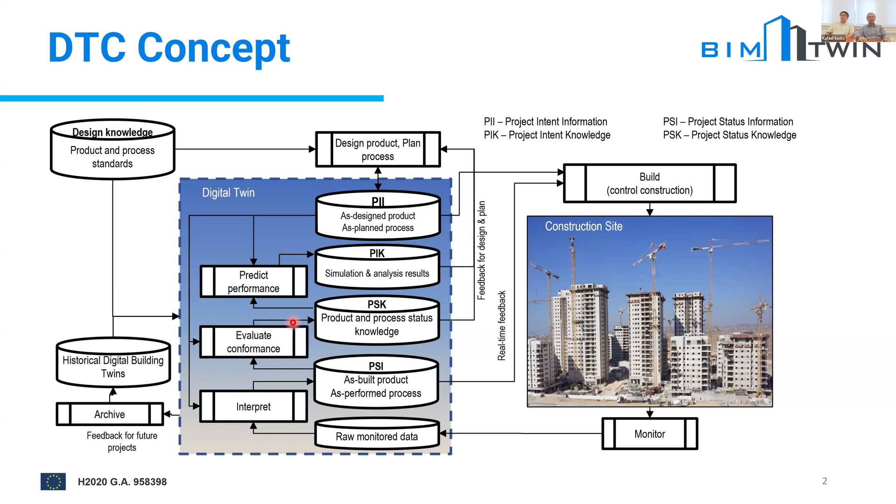The webinar we'll hear today focuses on the predict performance module here on the left, and we'll explain more about that as we go along.

The big idea here is to provide managers, production managers, construction managers, planners on site with an overview of the situation on the site, focusing on how the work is being done, the safety, the use of equipment, and in particular to give them an idea of how the production process might play out through to the end of the project, so as to be able to consider alternative plans and changes to the production system during the construction.

The BIM2TWIN vision as a whole is that we change construction from something that is amorphous and spread out and poorly defined, to one where everyone has access to up-to-date design information, real-time information about the status of the construction site and the supply chain outside of the site. All of that with the idea that we can then do informed, data-driven decision-making. And then it has the benefits that we list over here on the right-hand side.

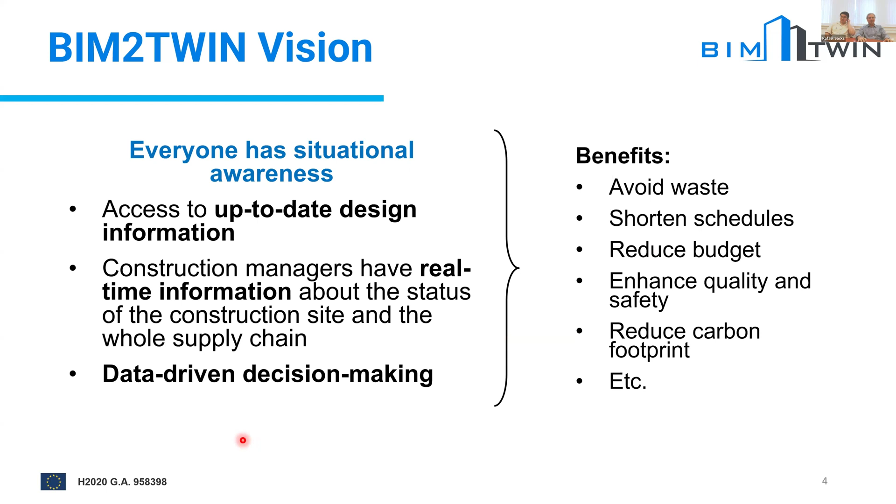The system architecture that we devised for the BIM2TWIN hardware and software revolves around the digital twin store, which we see here at the bottom, and we call that the digital building twin platform. So it has an internal data model, a schema defined in a broader ontology, and it's all stored as a set of interconnected subgraphs representing the as-designed, as-planned, as-performed, and as-built states of the construction project.

The information that we compile here derives from a series of monitoring systems where we have both initial data of the BIM model, the contract and schedule, and live data here at the top being collected on the site from various instruments.

The BIM2TWIN project contained 5 key work packages, each of which develop tools for these different vertical applications that operate against the DBTP. So they have volume control, process monitoring, surface control and process monitoring, safety control, equipment optimization. Those have been the subjects of the previous webinars.

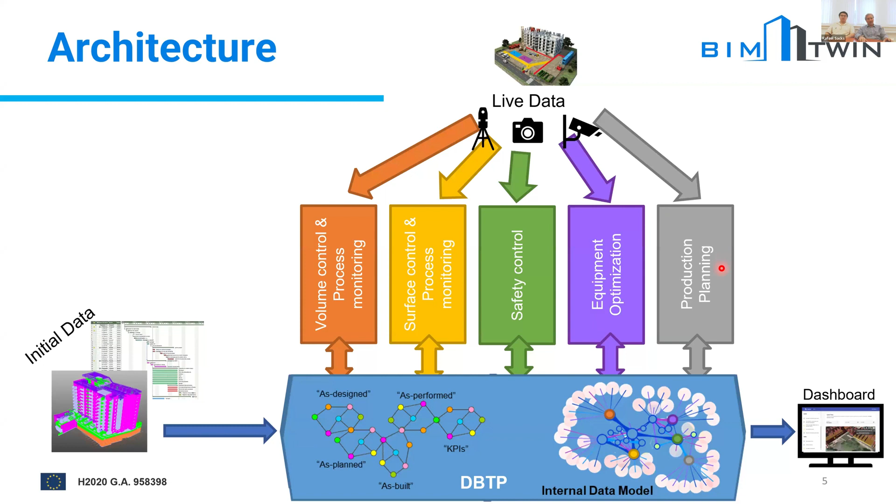Today's webinar focuses here on the production planning aspect, and as a result of that, we'll see both our local dashboard and the overall dashboard and how it's influenced by all the others. The generic DBTP situational awareness dashboard is where people have an interface into this data store, the graph, and they are interrelated with the activities of different work packages through the BIM2TWIN project. Today's webinar focuses on proactive planning and control, which we dealt with in the work package called Work Package 7.

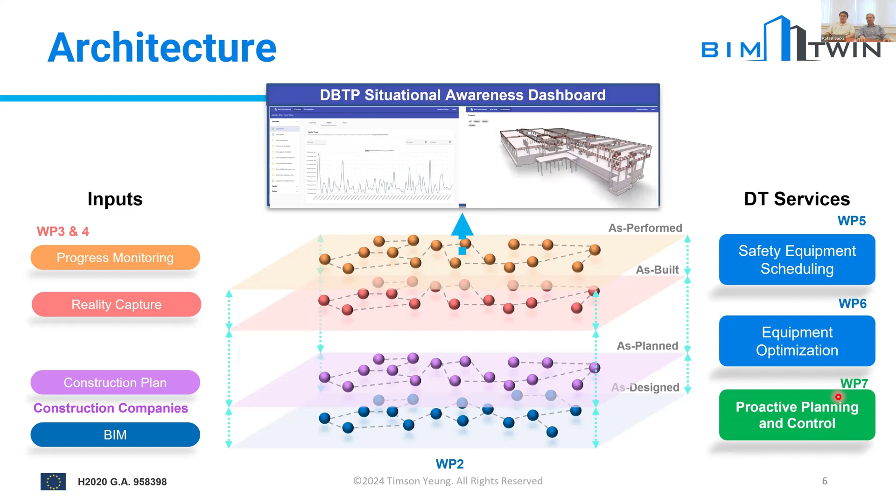We worked in both developing and testing and validating the system on different construction sites that are listed here in 3 different countries with 3 different project partners.

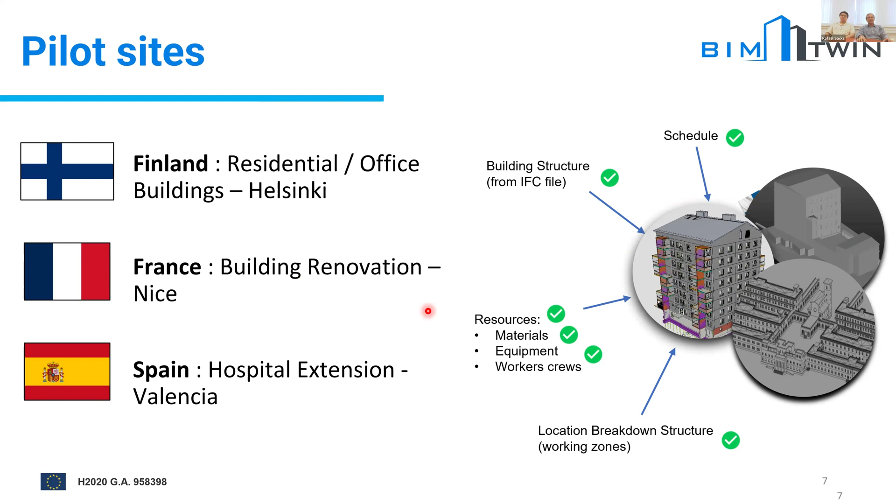This has been a series of 5 webinars, and this is the 5th of that 5. So here we are today on the webinar on production planning. I hope that those of you who are here with us and those who will see this later on video will enjoy and learn much from the session.

For today's session, we've had contributions from Flow Technologies, from SPADA, from IDP, and from Technion. We are the 4 partners who are active in Work Package 7. And with that, I hand it over to Timson.

Thank you. So in Work Package 7, our focus is particularly in the predict performance part, and then how using the project status knowledge and the project intent information, we can use those to predict the performance of the construction site and use that to contribute to the project intent knowledge information.

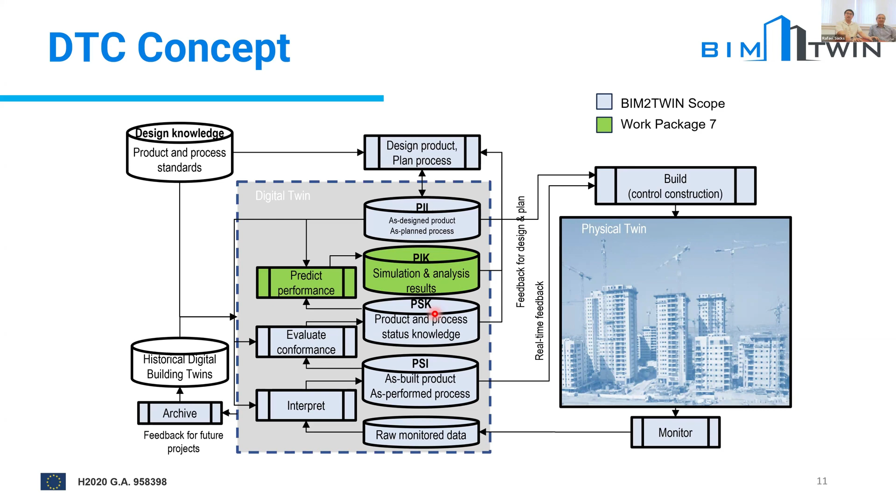In Work Package 7, we have 3 goals to accomplish the aim of predicting performance. First, we want to develop what the procedures are in order to predict the outcomes of production plan and design changes. Then based on those system requirements, we'll build that software and then test and validate it on the pilot sites that our partners in the consortium will provide.

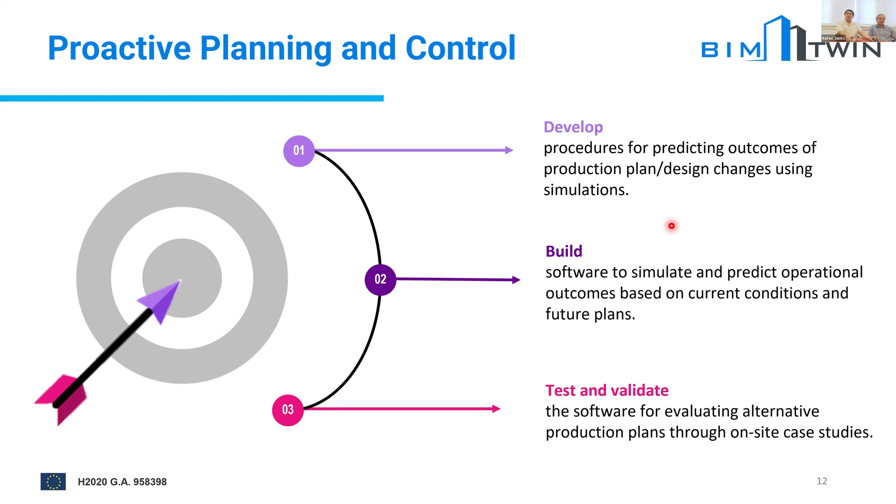In Work Package 7, we want to enable a cycle where users can define alternative plans or changes they want to make. We take this set of alternative plans and put it into the simulation engine, where we predict the fan of possible outcomes for each alternative. Then users can compare between these plans and select their preferred course of action. This information is put back into the digital twin to inform persons on site what the next plan should be.

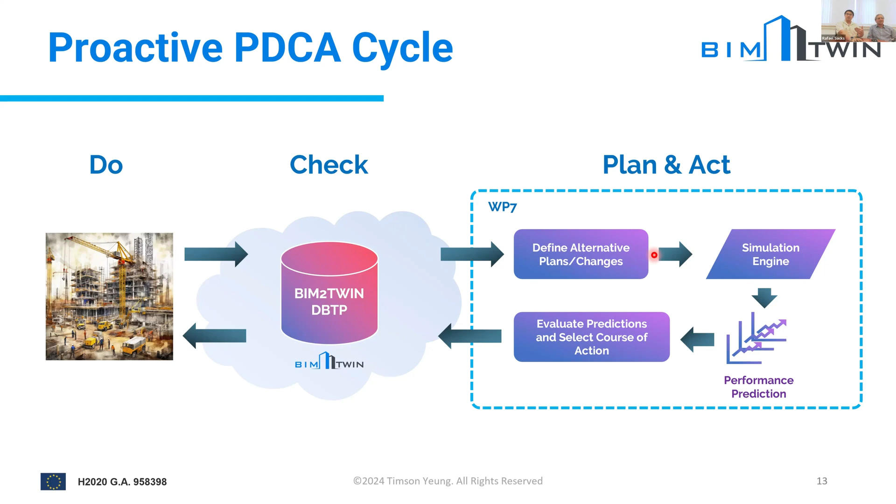What the simulation can do is take the original plan at this current point and ask, what if we stick to our current plan? What could be the possible outcomes? We can run the simulation multiple times, considering disruptions and variances in the production rate, running it repeatedly until the end to get a fan of all the predicted potential outcomes of sticking with this plan.

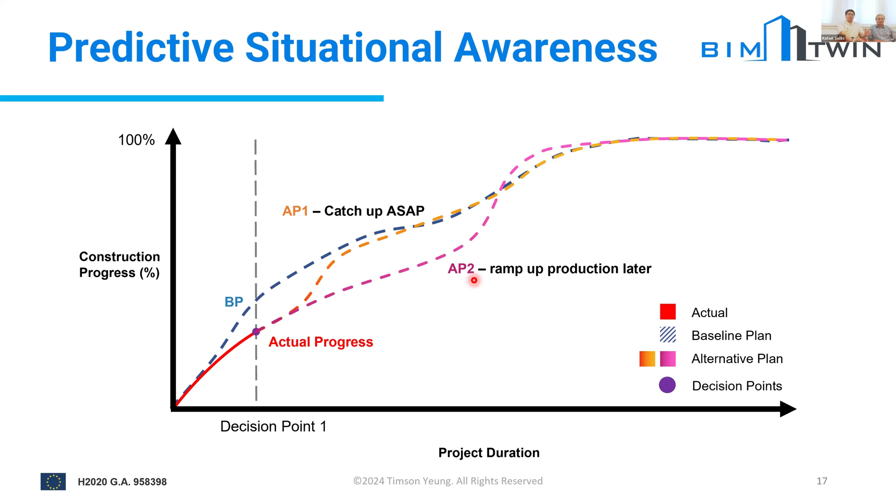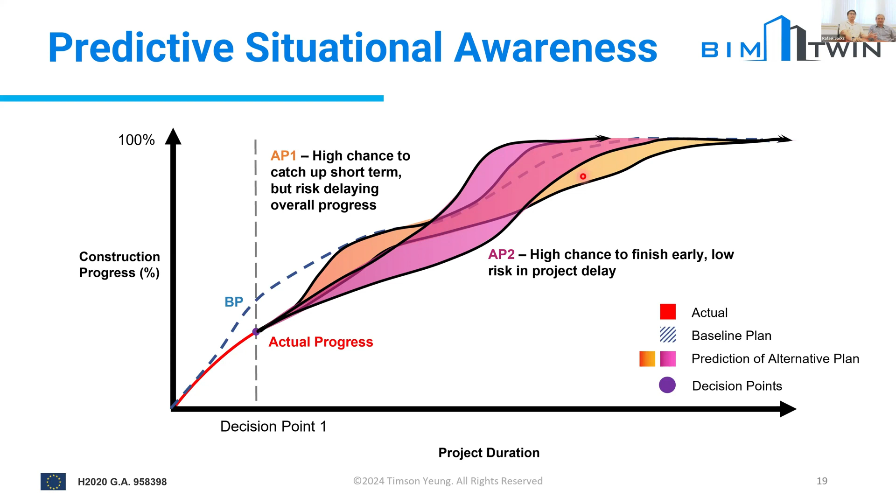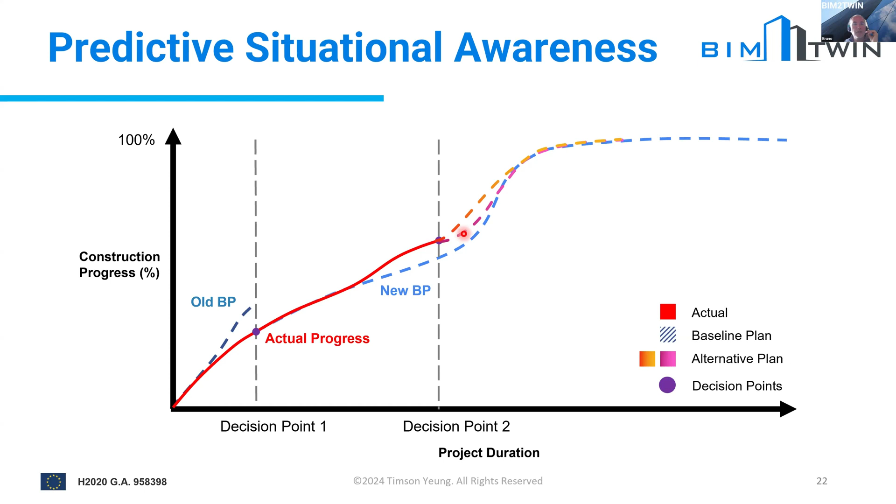Timson, sorry, I don't know if it's me, but I cannot hear you anymore. Yeah, me neither. Hello? Okay, it seems you're back. So sorry, where did I get cut off? At which slide should I go back to, or is it just here? I think it was here, yes.

So in this slide, I want to illustrate that this plan-check-act cycle can happen multiple times throughout the project. From decision point 1, we can go to decision point 2, where the project is actually ahead of schedule, and now we can consider whether we can slow down the pace, use less resources, save a bit of cost, while still finishing on the milestone. Here we can have alternative plans as well.

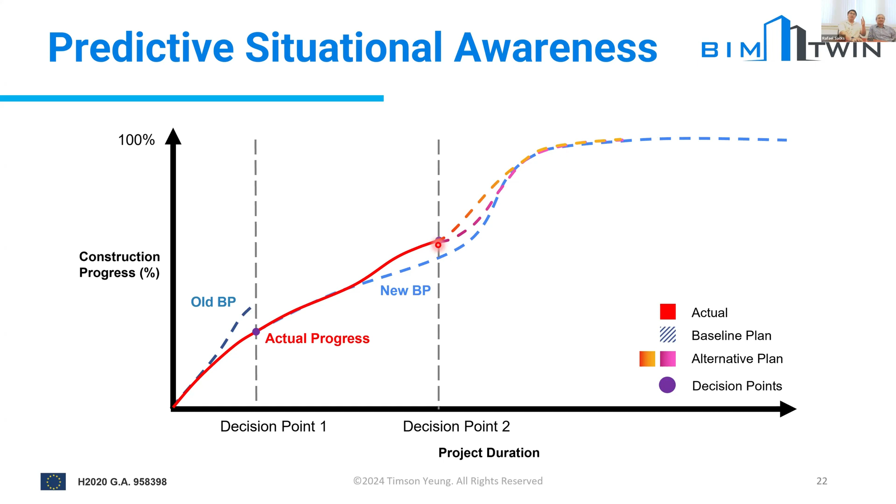One more thing I would like to highlight is that this plan-check-act cycle with simulation can happen with or without the digital twin. If we collect the data even manually, we can have this kind of plan-check-act cycle. But why is it important that we have this simulation together with the digital building twin platform? It is this factor of latency.

If we take our original case, for example, decision point 1 was right here, where there is already a huge discrepancy between the plan and the actual. Really, the first sign of delay happened much earlier, maybe 2 weeks, 3 weeks, or a month beforehand. But in current construction sites, this process of data collection, interpretation, and then ultimately putting it back to the decision maker's hand has a very large latency.

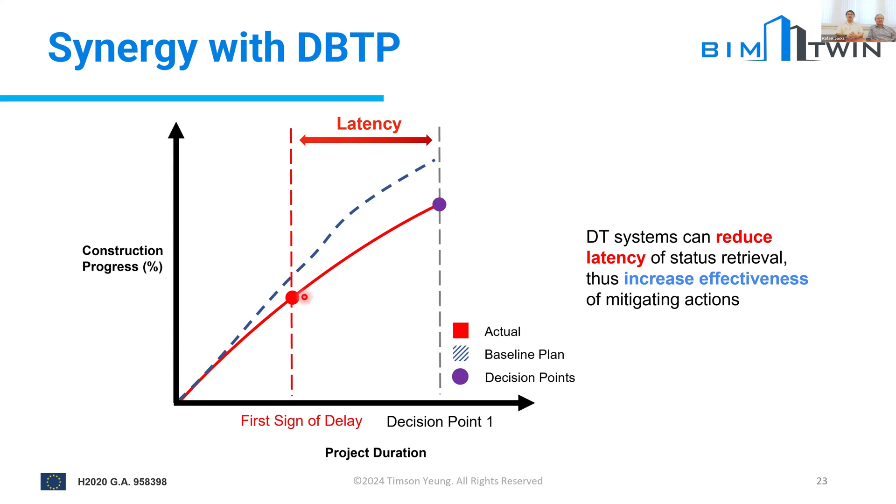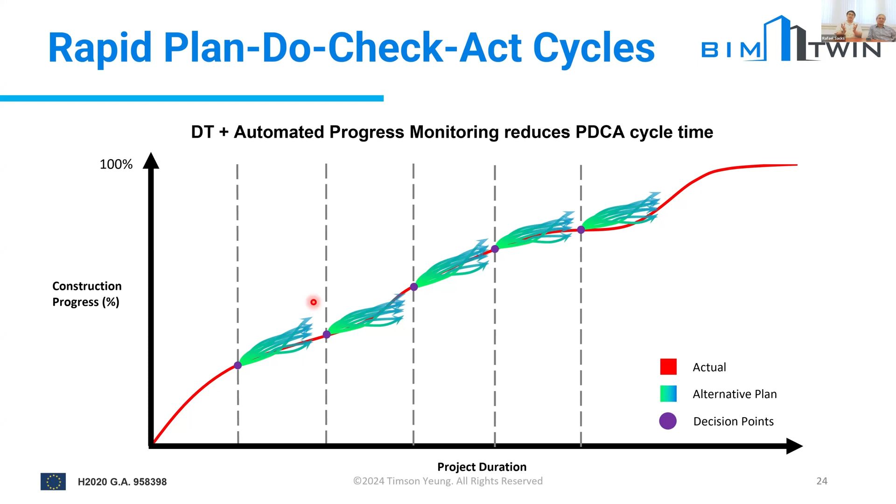And so ideally, if we can have mitigating action implemented at the first sign of delay, then it will be much more effective. That's what the digital building twin platform can offer, because with the combination of automated progress monitoring and real-time interpretation and fusion of this information, we can reduce the time from signs of disruption or delay to making a decision to mitigate that delay. So the plan-check-act cycle time will be shorter because of the digital twin platform. This is the synergy between simulation and digital twin.

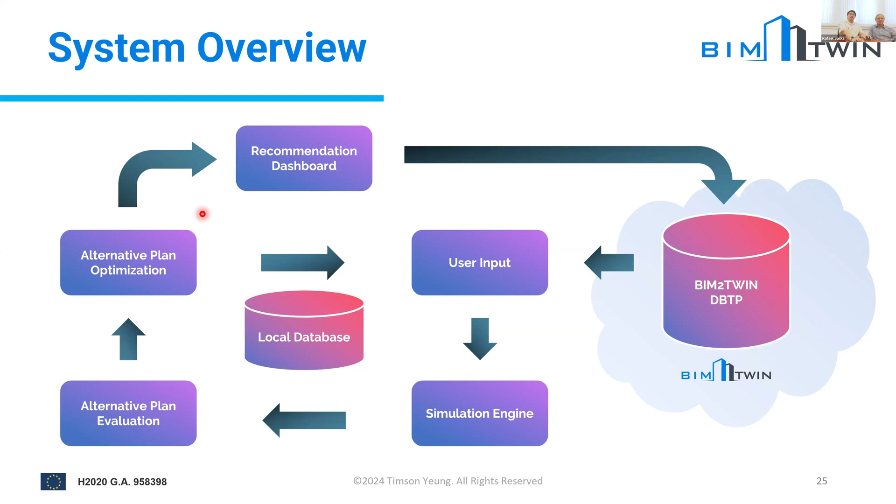Now I will show you the system we came up with in work package 7. Here's the overall system architecture, where the digital building twin platform provides us with the latest project status and project intent. The user can then decide their scope of action and degree of freedom in the plan. Once the alternative plans and their degree of freedom are defined, each plan can go through the simulation engine, and the output will be evaluated. We can either perform an optimization loop according to the range of degree of freedom, or provide results directly to the recommendation dashboard where the user can compare different alternatives.

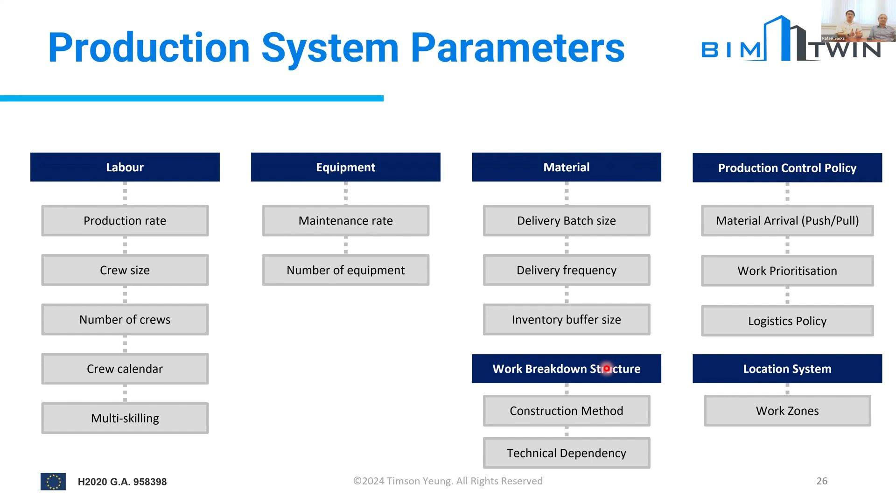When we're talking about alternative plans, we're not so much talking about the schedule, because the schedule is just about how we're doing it. Here we are actually talking about the production system parameters, such as resources like labor, equipment, material, and also production control policy, and the work breakdown structure and location system. So we're talking about parameters that the planners can change, not just the sequence of activity.

Let's take an example of how a plan might look like that the user can define. So for labor, we can have different work packages, such as HVAC. For HVAC, there are 3 crews, and for one crew there could be 3 workers. Their work hours per day will be 8, and they can be multi-skilled to do both ventilation and pipes. The production rates for ventilation pipe is 10 meters per hour per worker, and pipe is 3 meters per hour per worker. For each crew work package, these are the parameters that the planner can decide on.

With the production control policy, the manager can decide for each of the materials being delivered whether the delivery method is pull or push. Are the materials arriving according to some specified date in the contract, or is it something that can be pulled according to what's needed on site, perhaps even with a buffer?

The manager can also specify how the site managers are doing the assignment of work on site. Are they prioritizing closing off the floor so they can hand in the whole floor to another work package? Or are they prioritizing closing off by zone, sometimes by apartment or by room, if that's the unit of control, say for takt production? They can also prioritize the work either by the work quantity or by how much work quantity remains.

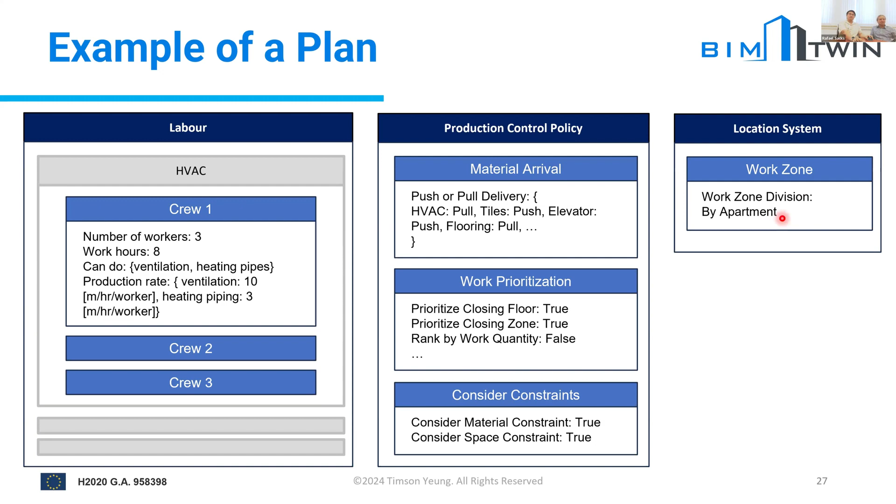In our simulation, we use the agent-based simulation method, where we model the complex system by defining individual agents or actors that interact with each other. An agent could be people, like the site manager or the worker, or it could be a passive agent like a block of concrete or a room. These agents interact with the environment and develop emergent behaviors.

There's a synergy between agent-based simulation and the way we've modeled our digital twin platform, because we've used a graph-based object-oriented way of describing the construction site. By defining agent classes, we can match them with the ontology we define in the digital building platform, thus creating parallel between the digital twin and our simulation.

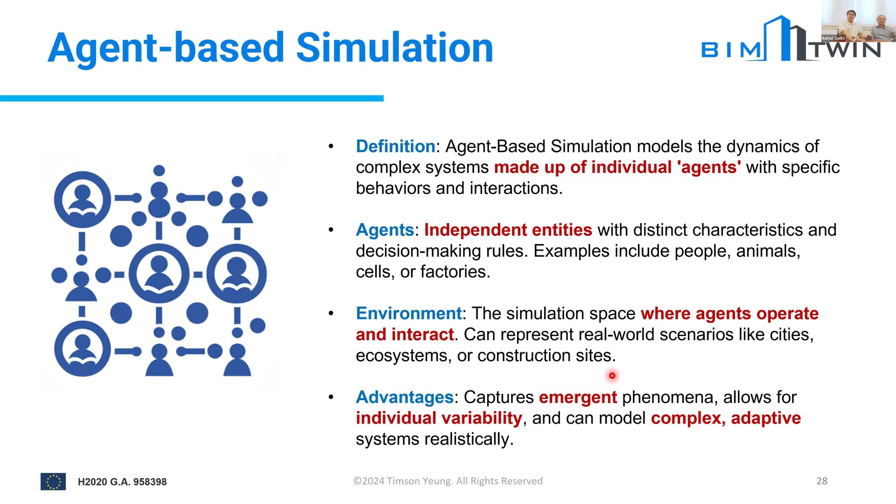In our simulation, we have modeled 5 categories of agents. We have GC management, which is a combination of the roles of the site manager and the procurement department. We have subcontractors who are responsible for the work crews, and the work crews themselves, which is really the core of the construction site where they perform work. We also have the supplier and the design firm, which would deliver either materials, components, or in this case, information.

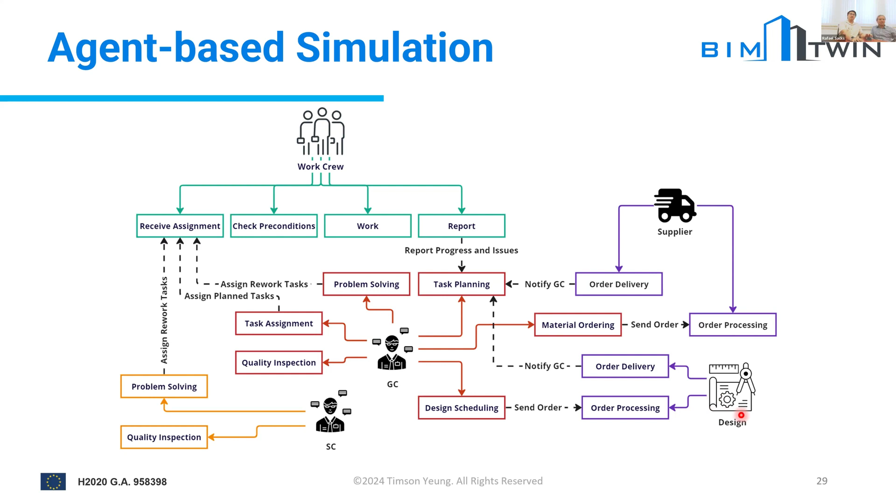To come up with this model, the first step we did was interview different persons on the construction site - workers, foremen, managers, and even suppliers - so that we could model the behavior of each of these agents. Here is an example on the right.

This is an example of the work crew, where the work crew first, once it receives an assignment, will check whether there's material. If there is material, then it will check whether the space is being occupied by someone else. If it is not occupied, then they can go to work.

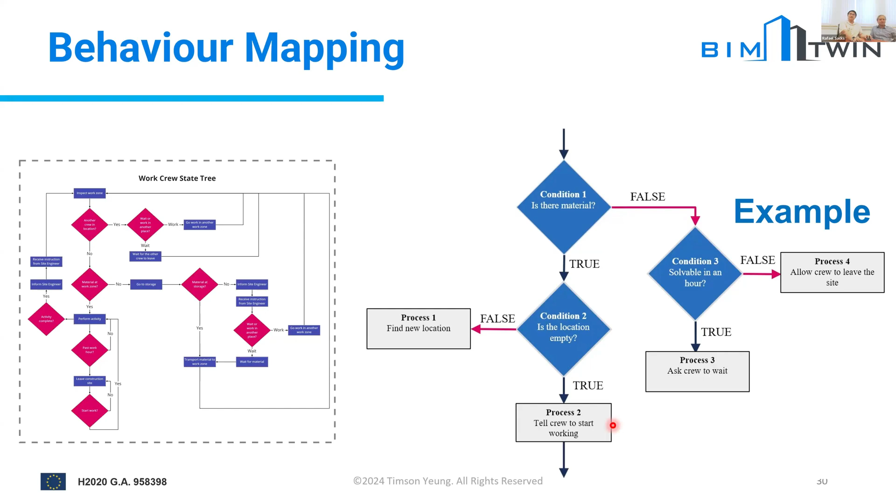Once we have all these behavior trees done with each of these agent classes, we modeled it inside the simulation software called AnyLogic. Here, each agent has 4 main parts.

The first part is the parameters or characteristics that are defined from either the digital twin or from the input information that the planner had got. Then there are perception variables, which is really the brain of this agent - this is their memory, of what they have done, what they needed to do, and also where they're at currently.

Then there are behavior functions, what we call the specific logics for their action. Finally, all these parameters are used in the behavior tree on the right-hand side, where the agent can decide what is the next course of action, depending on where it is at in time and in space.

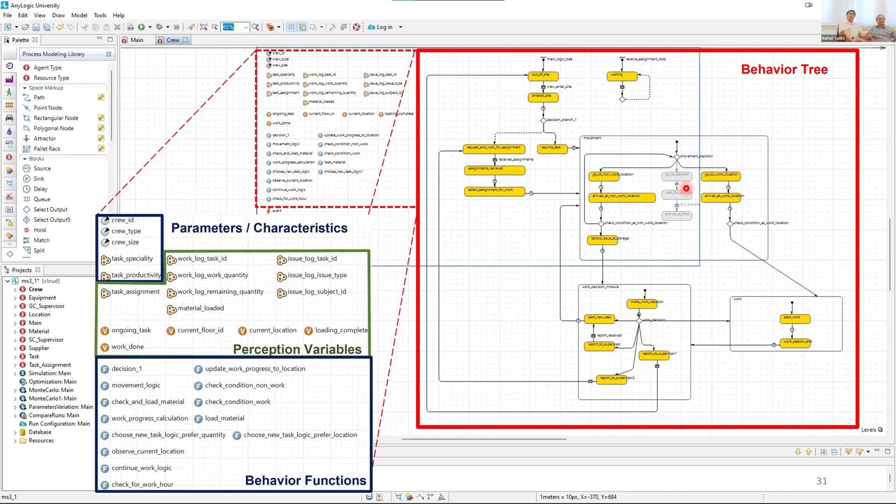Continuing with this part about synergy with the digital twin - a big part that we felt was very important is that the simulation model has to be able to take the latest, most up-to-date status, that of the current day, and then initiate a model that starts at that current date, instead of always starting at time equals 0. We believe it is only when we can take the current status that we can have the best prediction of the future and avoid a garbage in, garbage out situation.

So this is how we are able to do this. On the left-hand side, we have several sources of information. We have the digital twin platform that provides us target status. We have agent templates where in AnyLogic we've defined for each type of agent what is their default behavior and what are the toggles that they can switch on and off based on the status. And we have the user input module, which gives us what each alternative plan would be, then adjusting the toggles on the agent classes based on that.

Finally, we have a historical database that can be used to calibrate the production rates and the rates of disruption. All this information is fed into a parametric generation algorithm that takes the project status and the agents, and generates in each simulation what is the state of every task, what's the state of every zone, and what are the states of all the agents - their parameters, what they've already done, and what they will do. Each of these simulation runs will be run for that current state.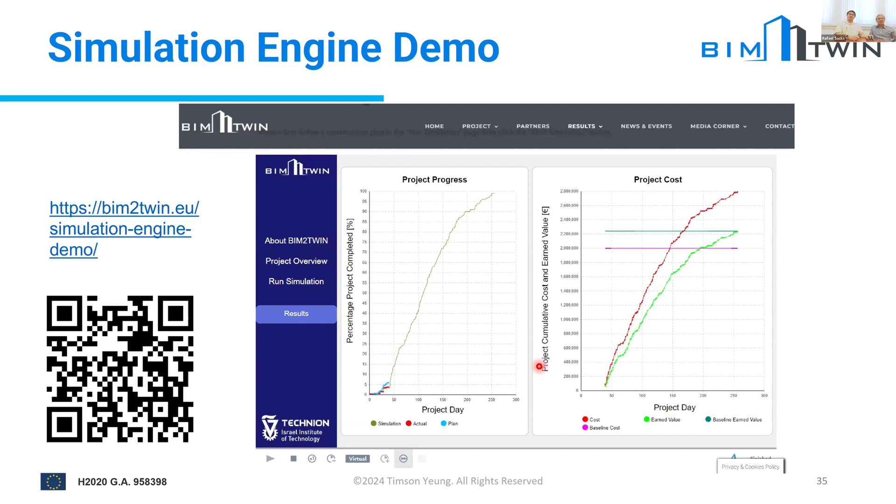In this one, you can change and define the different crew parameters and also the production control policy, and then run the simulation one time to see how it would look, starting from any day within 0 to 120 days, and how that simulation goes for the plan that you choose.

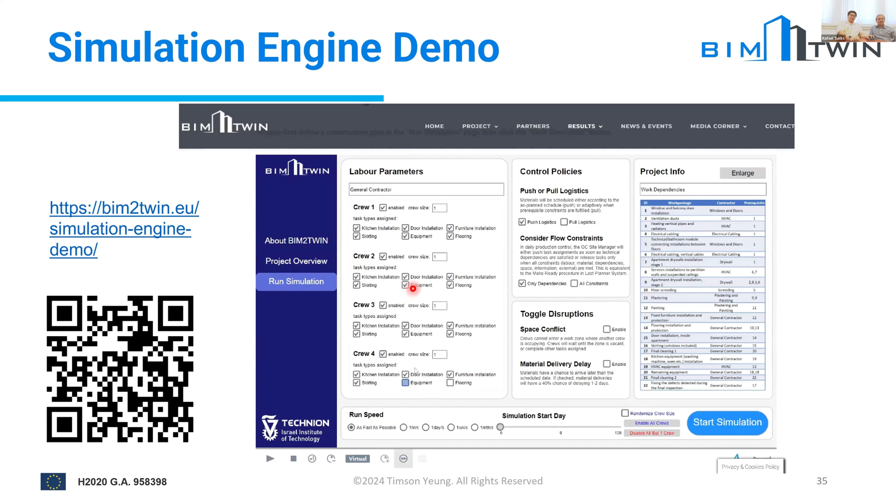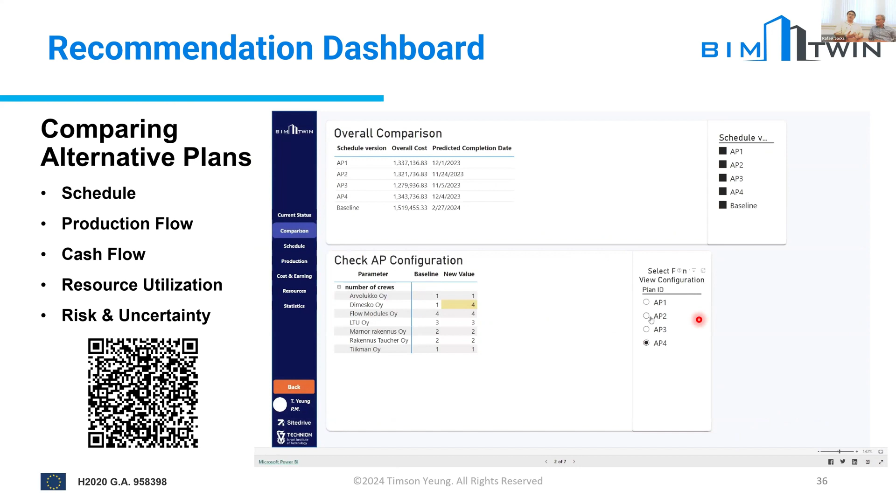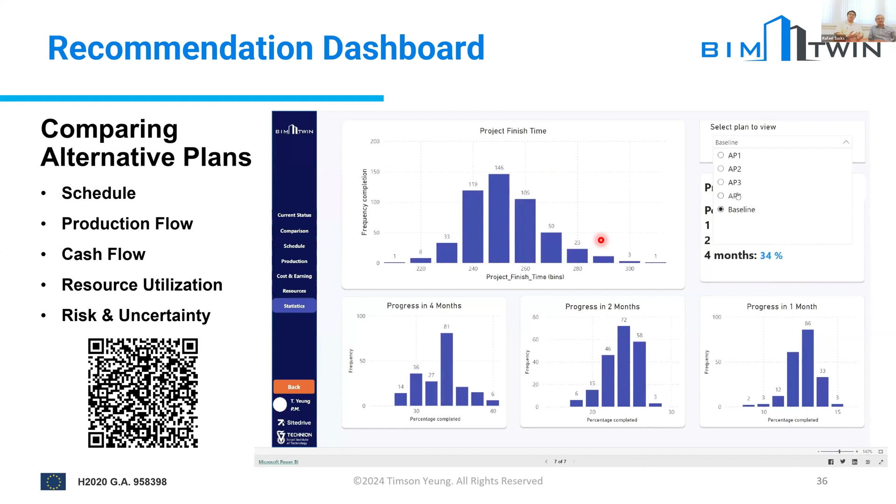We also have a recommendation dashboard that we developed jointly with SiteDrive from Flow Technology, where we can take a set of alternative plans and compare the results between them for their schedule, production flow, cash flow, resource utilization, and what is the risk and uncertainty. You can also check this recommendation dashboard out for yourself with the QR code.

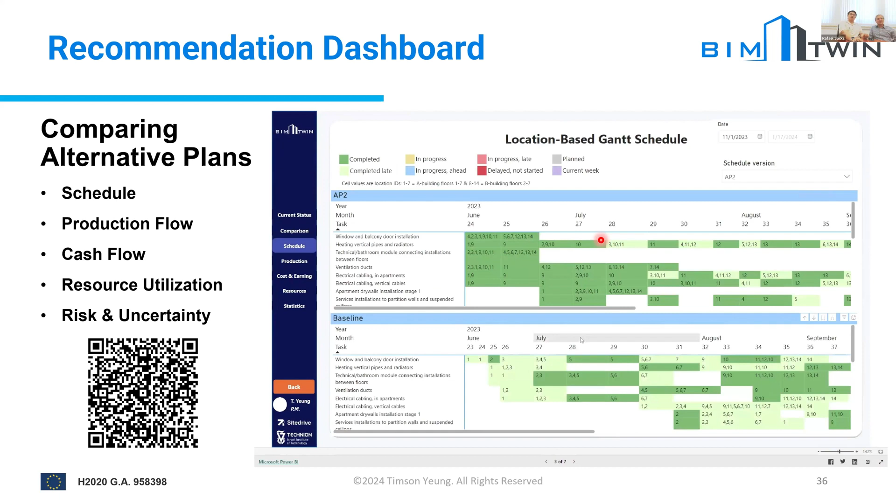Now, to close this all up, once the plan has been selected as the new plan, we need to put it back into the digital twin platform. This is the part where we've done quite a lot of close collaboration with Work Package 2 in the BIM2TWIN project with Orange, where we can pick up on where they have developed a way to store all this information as a huge graph.

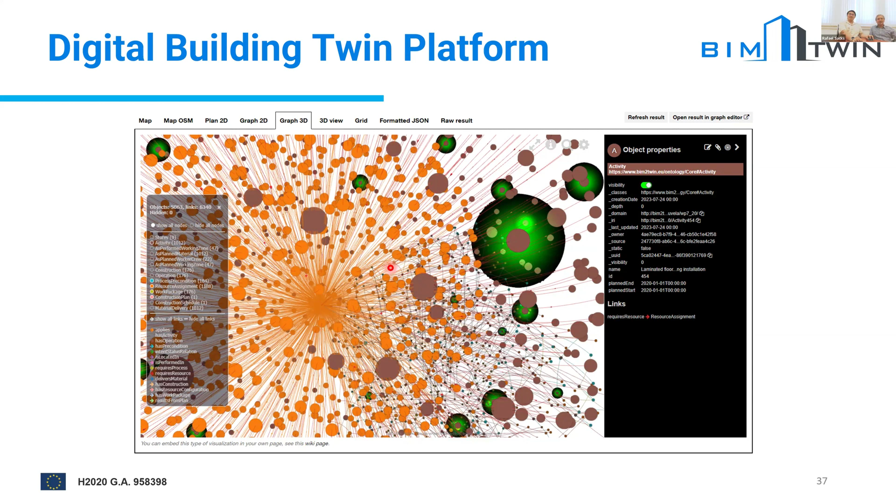In Orange's Thing'in platform, we're able to use API calls to first receive what is the current latest plan. Then, once the user has decided what the new plan would be, we can use the API to rewrite that plan, upload a new plan to the Thing'in platform graph, and set that as the new baseline.

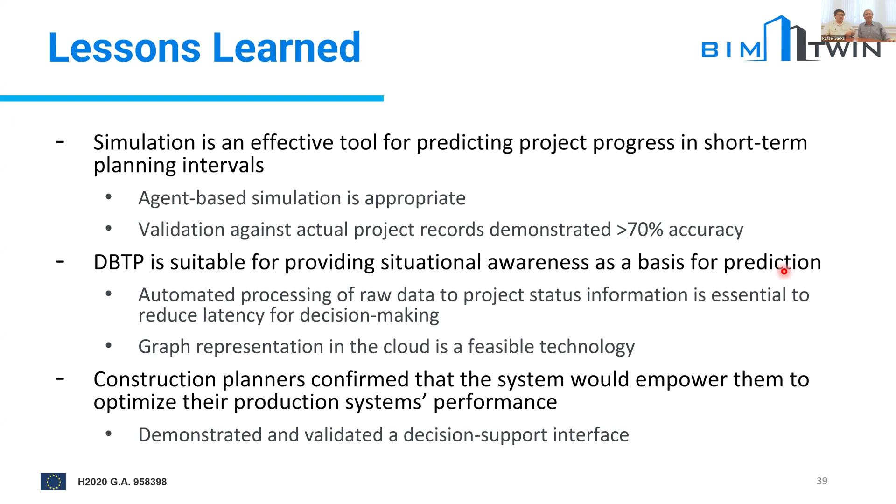And finally, we'll skip to our last slide and say this: as any research project ends, there is future research to be done, but we've been able to pinpoint, I think, the issues that need to be tackled going forward for commercial implementations.

That is, firstly, that a digital approach requires data to be structured and coordinated. So collecting raw data on site is possible, but that needs to be structured, interpreted at the level of raw data to information, but then it also needs to be merged with various streams of raw data in order to get the information and knowledge we require to truly assess what the situational awareness is.

The technologies we used for data collection are becoming far more mature. Not only that, the algorithms for translating raw data into meaningful information about building objects and building processes is evolving very quickly. It's way ahead now of where it was four years ago when we began.

But there are a few points where we still need to consider, as researchers, how these problems will be solved. The design-to-execution transfer, where we go from project intent models to the actual construction site, is something we haven't dealt with very much. The deployment of digital operating twins, on the other end, is a question: how do we go from digital construction to digital operation and maintenance, and what information needs to be handed over?